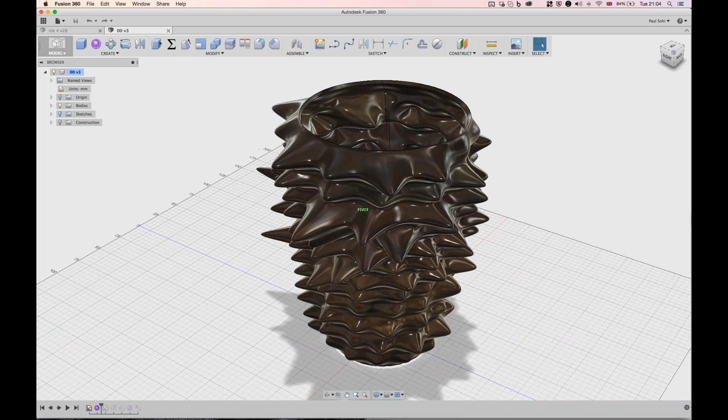If you don't, ferrofluid is an oil with very fine iron filings in it, and when you start to mess around with it with magnets, it sort of looks like it's come alive, and you get these really quite amazing shapes.

Now, this didn't actually take very long at all. It took me about 20-25 minutes. I'm going to go a little bit slower today, obviously, so everyone can keep up to date with what I'm doing, but I think that's enough of an introduction, so let's jump right into it.

So I'm going to go File, New Design here, and I'm going to jump straight into the Create Form environment. Just to begin this, I'm going to create some circles for my loft.

Now, I'm going to first go to Offset Plane, and I have this one here. I'm going to pull that up to 190. This was designed to be 3D printable inside an Ultimaker, so any 3D printer that fits that kind of volume will work just fine.

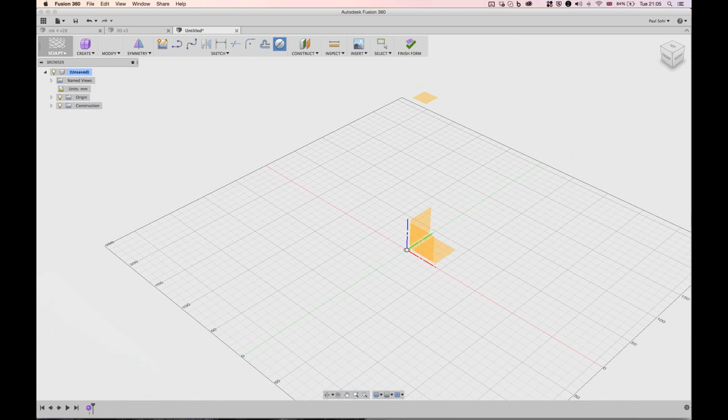Next, I'm going to draw my bottom circle. Let's jump in here and make that one. Let's go with 100 mil.

Then stop that sketch, draw my second one, and pick that plane up here. That's why I drew that one, and I'll make that one 160. So that gives us a pretty nice set of circles to begin with.

So next is loft. Under create, we've got loft, and I'm just going to pick my two circles here, if I remember to click on them properly. There we go. Now, I'm just going to say this now because it's pretty important.

So usually when you use the sculpting environment, I would say that you should treat this very much like a CNC treats a piece of wood, or more appropriately, a sculptor would treat a piece of clay. So really what you should be doing is a first pass, which is rough, and then you go through and add more details.

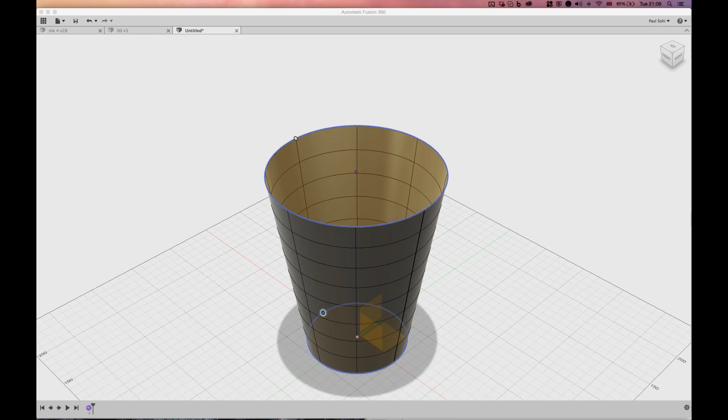So usually your cone, your pipe, your block, whatever your starting object is, you'll start with the least number of necessary vertices. The vertices here are the faces, the length spacing, and the width spacing. If I change that number here, you'll see that adds more faces to my object.

Now, this guy over here is pretty complex, and it was made just using the edit form. We're going to cover a lot of the edit form, but because I've jumped between the two tabs, it's going to assume I'm finished with it, so I'm just going to undo that and go back to the loft.

This requires a fair amount of detail. Now, to begin with, this might not make a huge amount of sense, but as we get into it, you'll see why I'm putting a lot of faces in.

So I'm going to go by 20 and 15. Actually, you know what? Let's make that 12. That looks good. I'm going to hit OK there.

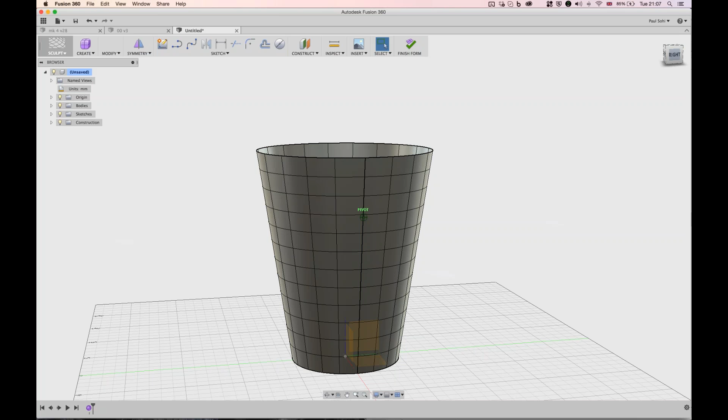So we're still in the sculpt environment, and we've got our basic piece. Looks very much like the garbage can under my desk right now. But here under Modify, my default Modify icon is missing. I don't know why that's happened. Let's just push that back up there.

We've got Edit Form. Now, when you open Edit Form, you've got a huge number of options here. And thankfully, today, I'm not going to worry too much about this.

But the ones that are worth knowing is definitely here in the selection filter. So you'll see as I hover over any of the faces here, I can highlight a face, I can highlight an edge, and I can highlight a point as well. Now, sorry, a vertex.

You might find this a little bit annoying. Maybe you're working on something that requires only manipulation of the vertices, or maybe only manipulation of the faces or edges. Well, all those options are right there. So you can just filter that down, and you can filter to just bodies.

So because of what we're doing here, I'm going to choose vertex, because I'm only really interested in the points here. So as is the case with anything else that you do with Fusion, when you're manipulating something, you'll get your manipulation ball.

Now, this is pretty interesting because it works a little bit differently to what you might be used to in the modeling environment. So in the sculpting environment, you'll see we've got a few additional ones.

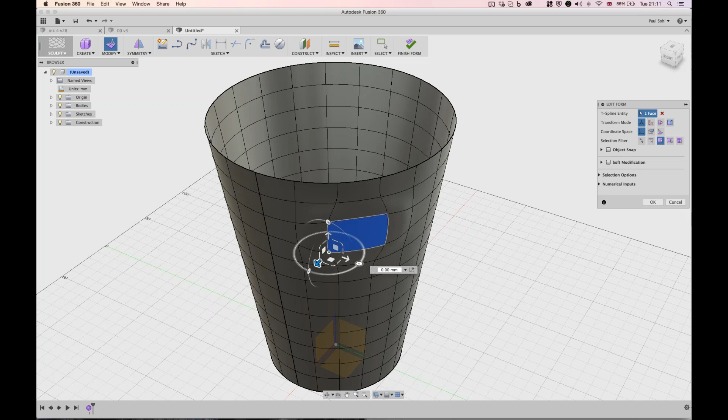And then once you've clicked in, just make sure that you OK that, because you can also change the default position of your gumball here as well before you start moving things. So if you just hit Done, you can see now, as I move that face around, how that's adjusted the pivot, and so it adjusts how this whole thing gets played around with.

So that's a pretty quick overview of how those work.

Now, in the case of this guy, what I did here was I used the pull tool, or rather I used Edit Form, and I pulled at the vertexes to create this shape. Now this was pretty intentional.

If I sort of freeze it there, you can see that there's a rotation along this line here, and that kind of follows all the way around. So if I twist it around, there is some kind of reasoning to my design.

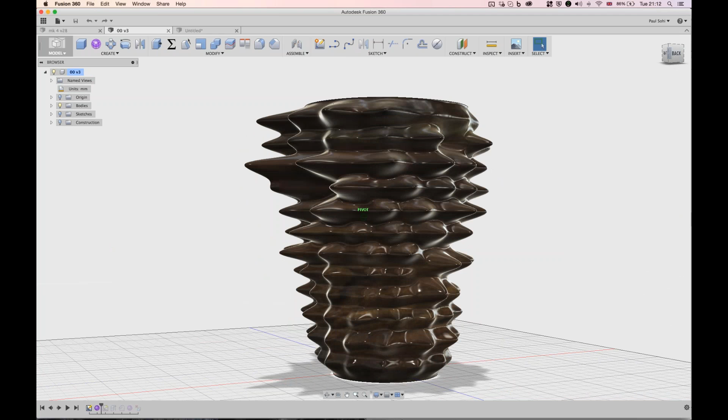Now, let's get involved. So let's grab our Edit Form, and change this to vertex again.

I would suggest starting at the bottom here. So if you're following along with me, I'm just going to grab this one here first and minimize this guy here. And I'm going to use my freeform movement here in the ground plane.

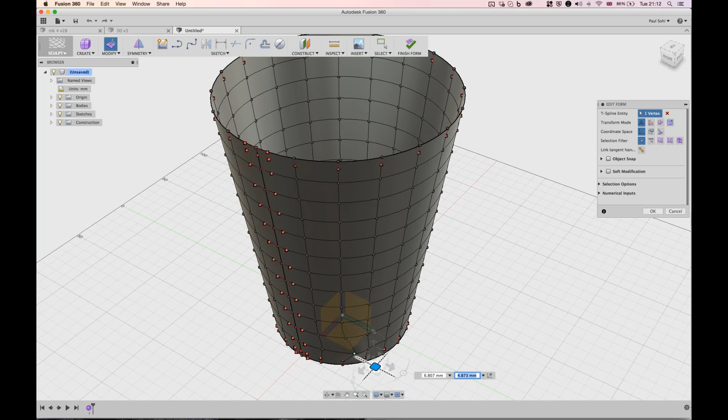So if I grab that and I pull him out, you can see, whoopsie doodle, that guy went a bit crazy. Let's pull him back into position.

You see as I pull it out, because I'm using the point tool, you get this kind of nipple effect, right? So the more you pull it out, the more pronounced it's going to get. But obviously you don't want to keep pulling it and then just look at this thing and say, well hey, yeah, I've got this nice point that I wanted, but as a result it's also ridiculously far out from my object.

So the way that this effect was achieved here is I have a push point here, and then where this indentation is, I've pushed it inside. So if I go here, you can see that there's an internal push as well, or pull rather. So I pull it out and I push it inwards, and that's how the effect's created.

So I push this one out. Now I'm going to go back to edit form, and I can grab this guy.

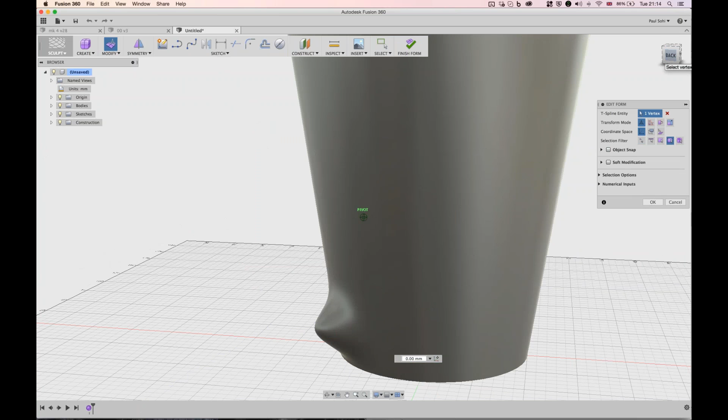I'm having some performance issues here, so I'm just going to change back to all and pull that chap in. Seems about right, but I'm still not too happy with that pointing, so I'm just going to grab the other guy over there and do the same thing.

Now, that basically covers how this form is created.

So I'm just going to go through and I'm going to grab these guys, give them some movement. Whoa, that guy is not happy. Let's just pull that round.

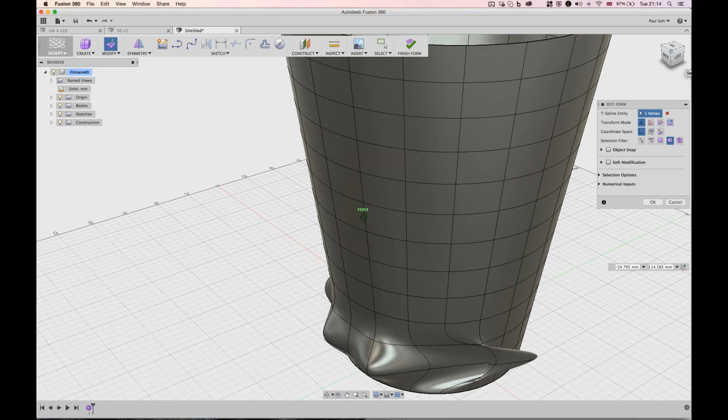And just keep that around the bottom. And start to get this.

While you're going through this, we have a question here: how did you set up the cone shape to begin with? So I did a loft between two circles. I'll start a new drawing and show you how I did that real quick.

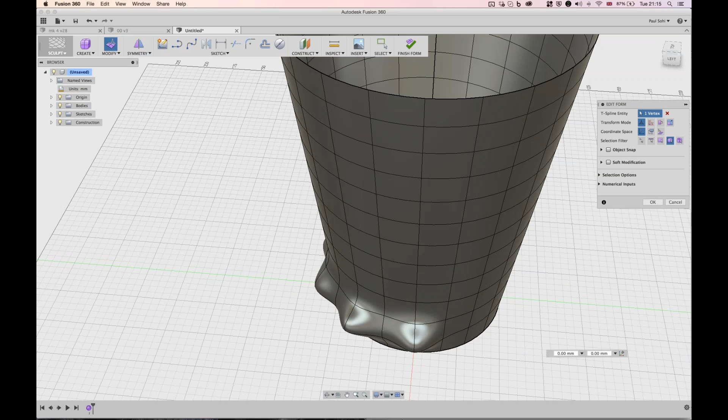Hope it doesn't throw you off too much. No, not at all. So just make sure you have your origin on - if you don't have your origin on there. And I'm in the sculpt environment, so if I go back to model, you see just to get to the sculpt environment, we've got this create form.

And when you click on create form, you'll see this snaps, and you've got a new tool set here, and you're in the sculpting environment. And the sculpting environment is T-Splines, so if anyone knows what T-Splines is, that's the kind of environment we're working in.

So the first step here was to go under construct and pick offset plane. And the offset plane allows me to grab that origin point and then pull it upwards to create a second drawing plane. I'm not going to use dimensions this time around just to show you how I did that.

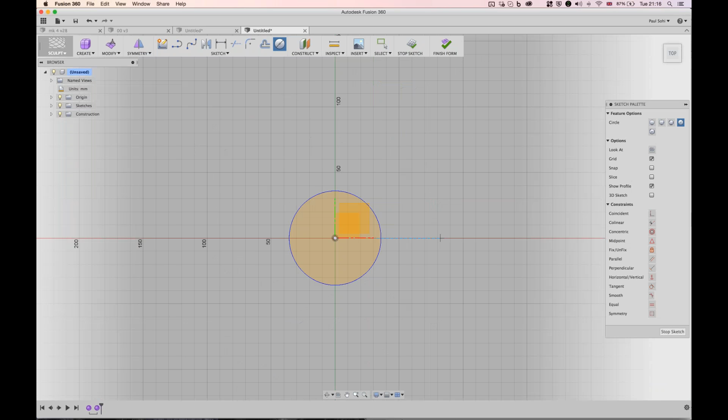So go 130, and I drew a circle on the top, on the ground plane first. Let's just make that there. I stopped that sketch and drew a second one on this plane up here. Pull that guy out and stop that sketch.

And under create, we've got loft. So that's how you get your cone. And then you can add the number of faces you want here. When you're happy with it, you can just hit OK.

You might get thrown off by this - like my default logic the first time that I made this was to go to create and then pick cylinder, and then I scaled the whole thing out. I don't recommend you do that because you'll end up with errors with this guy. But I hope that - yeah, that's perfect.

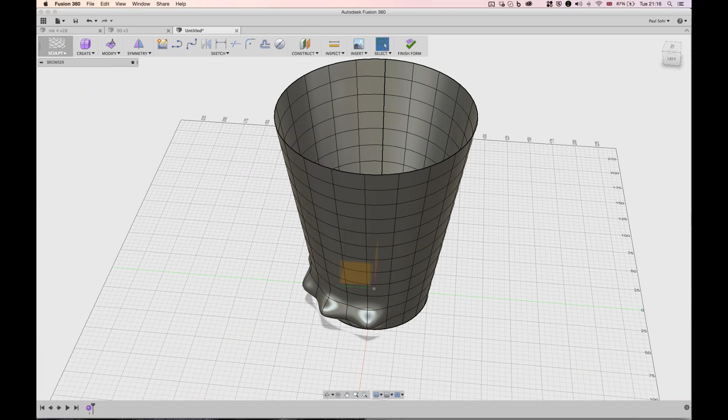Thank you. No problem. So I'm going to go through and I'm just going to keep on doing that around this guy until, whoa!

While you're working through this as well, we have another quick question for you: could you use the mirror command to speed up the pulling process?

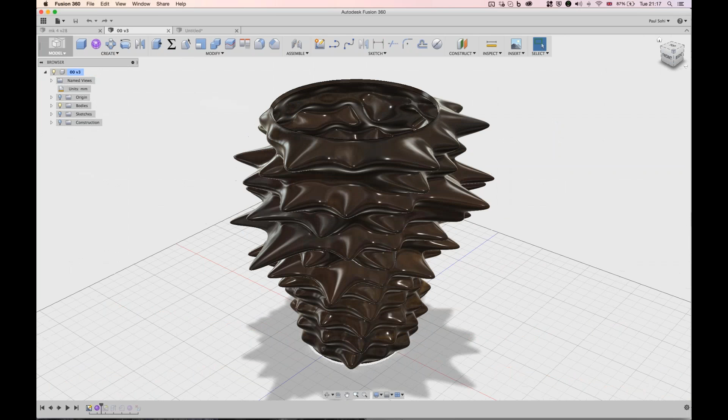You absolutely could, but in the case of this design, you'll see that this isn't actually symmetrical. So while I have this kind of rotational pattern here, you can also see that I've, if I could put my extremely haute design hat on, created these moments on this sculpture. So there are these points that get pulled a lot further out, like over here. And if I was using the mirroring tool, that might work for the first pass, but then you'd have to not be mirroring anymore to create these effects without bouncing off on the other side. But if you wanted a very symmetrical form, by all means, you could absolutely do that.

You've got to make sure though, if you're going to use symmetry here, that you've got a form with actually an odd number of vertical edges, so that you can pick one of those to create a uniform symmetry line. I'll just show you what I mean quickly. If I grab a box and I draw a box here, if I pull that up and I want to create a symmetry across here, this will be fine because I've got one edge running the whole way through.

But if I pull it so it's like that, and I have 3 faces and 2 vertical edges, if I try to create a symmetry line here, now if I go under symmetry and I create mirror internal and I do that, can you see how I've got these green lines all the way across like that? It's not going to work. It's not going to be ideal for what you want.

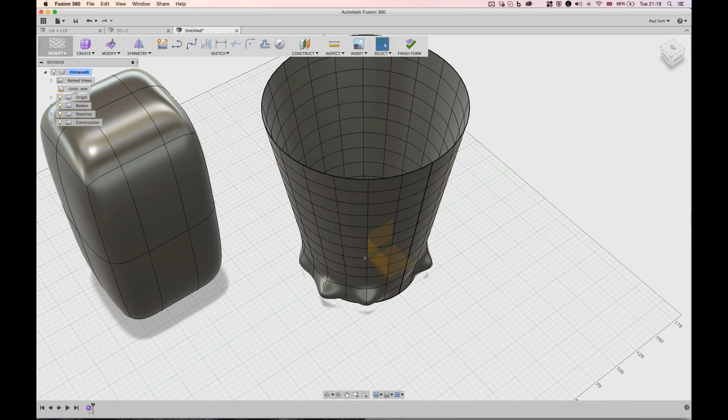So what you would want is, I'll do that one more time real quick. So if I do this, let's just okay that, and I pick symmetry this way, I've got a nice continual green line. And that way I know that my symmetry is going to be nice and is going to work properly. So let's just get rid of that guy. And we've got our final modification down here. You can pull that up because that's actually in the plane.

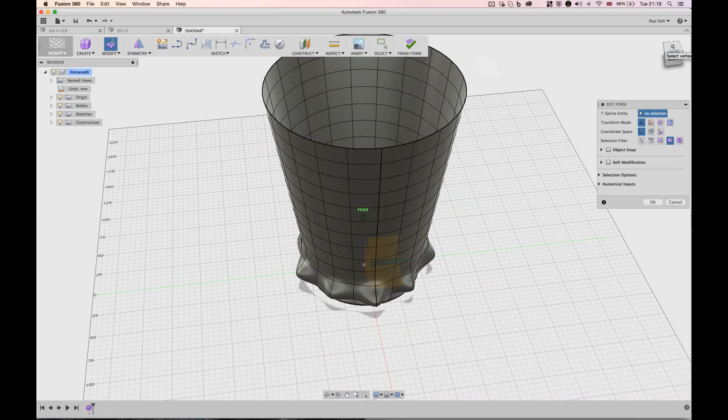Now the next step with this guy is just to go through and pull these ones in. Now I'm just going to show you a slight shortcut to that. So I'm going to go around and I'm going to pick these guys one by one. I've got nearly all of them. Of course, bear in mind, anyone who is planning on making one of these or is making one right now, I picked this number of faces because I want a relatively complex object. You could have picked less, and if you pick less, then you'll have a less complex thing, but you'll certainly achieve the same kind of aesthetic goal here.

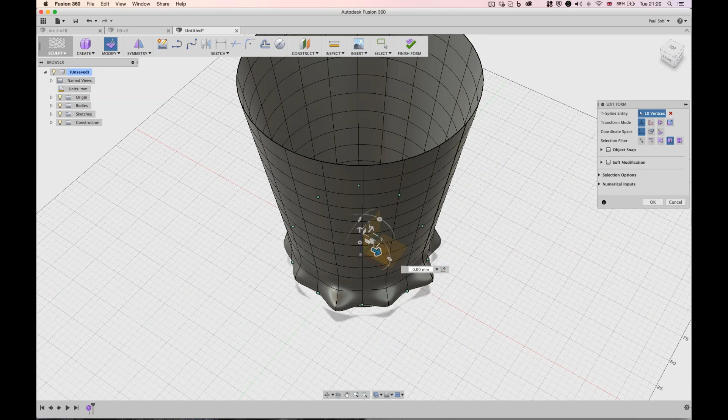Now you'll notice that because I've picked all of them and I'm in a circle, my manipulation tool is right here in the center. And because I want to create that inward indentation, I'm just going to grab my global scaling and pull that in. Oop, if I can pull it the right way, there we go. And that's starting to give me a nice kind of indentation effect. It's a little bit more pronounced here because that's the one that I moved manually. And I'll just keep going around and you can see how that's happened.

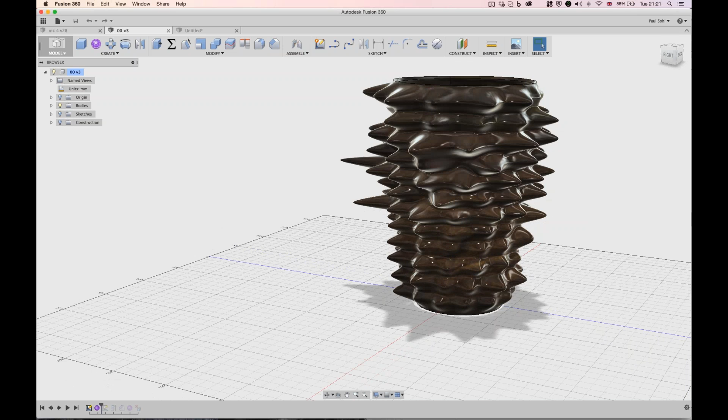And just to keep that pattern going and to create that rotational effect that I've got here, so you can see how that sort of staggers its way up. That's created by just doing the same thing that I've done here, but pulling one dot across. So I picked this vertex rather than the same vertex above it, and if I pull this one instead, you'll see what happens. So now, I've done this on purpose.

You'll notice that there's a bit of a problem here, because if I grab this guy, then I'm affecting everything, and that's not really going to give me the shape that I want, because if I then go and do that here, I'm going to end up with a bit of a weird kind of, grab the right one, excuse me, where are you? There you are. Grab that through, and that's not really going to create the effect that you want. You're just going to end up with this weird kind of amorphous blob.

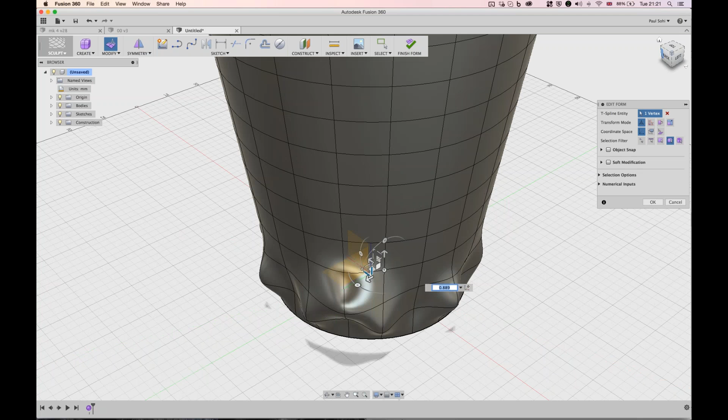So you actually have to give yourself a bit of spacing, and that's part of the reason that I picked such a high number of faces to begin with. So I can't grab that guy. I've got to grab this guy up here. Now, I grab that vertex and I pull it through, and you can see that I'm getting the effect that I want.

I'm still affecting this guy down here, so I will have to come through and pull him inwards to counteract what I was doing before. And that is starting to take shape. So I'm going to blast through this. So we got something kind of nice.

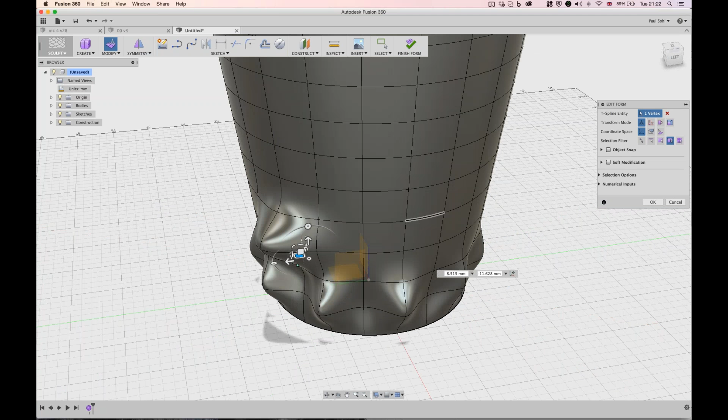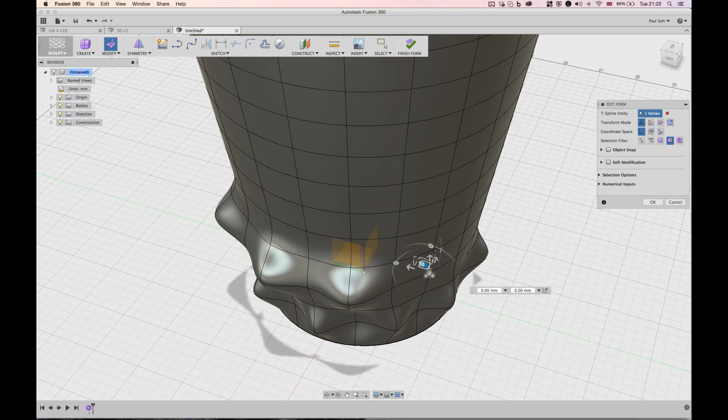Now if you're 3D printing this yourself at home, this does work on an Ultimaker. I've printed this out a couple of times on an Ultimaker. It does take a while. It is a pretty complex object. Any FDM machine should be able to handle this if you're smart with your support material. But for best results, I guess, always use SLA.

Let's just go through and just keep grabbing those guys. And one more. And just keep doing that. Oh, this one's gone a bit funny. Let's pull him out over here. This guy, do that. And maybe there. All right, and this is starting to take shape.

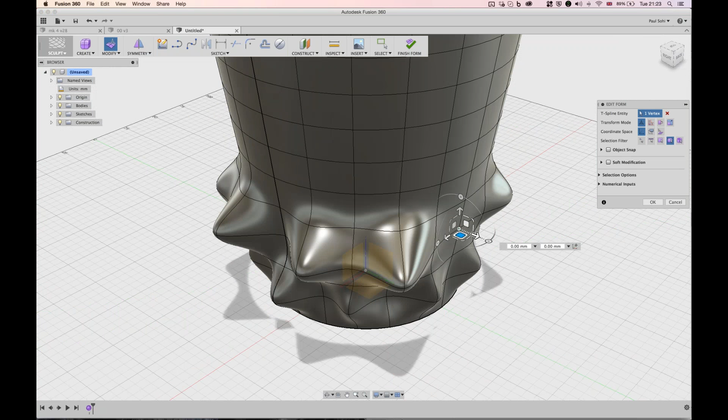And so what I was talking about earlier, if I grab this guy, so this point is relative to here, and then correspondingly over to here as well. So if I grab him and I move him inwards, you'll see that starts to create a really nice accentuated effect on what we're trying to get. And let's just pull him out a bit more. So let's give that guy a little bit of definition. All right, whoa.

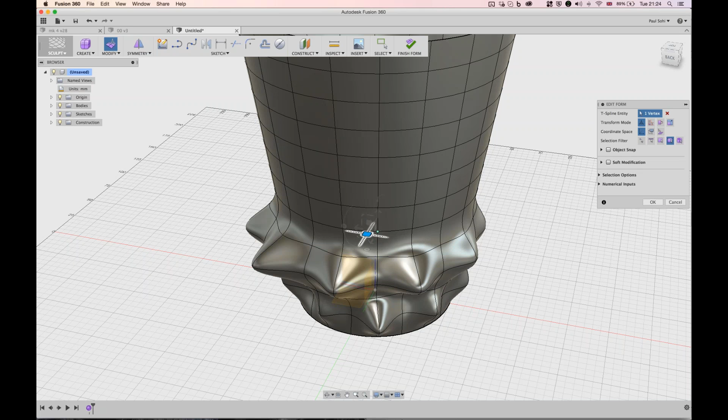So once again, I could pick this guy, but if I do that, that's actually the correct one. So I'm just going to do that. I'm going to keep going around, and of course, keep firing those questions at me if you have any more. So let's go through. Let's grab these guys.

I have one more for you, but it might take a little bit of time. Oh, go for it. All right. So could you explain a little bit more about the star and T-points? Like, when do they appear, and what good are they, and how can you avoid them? Sorry, the star? Sure. Oh, right, I can't see the questions. The star and the T-point. I'm not actually sure what that's referring to. Pascal, if you're still around there, could you type in a little more?

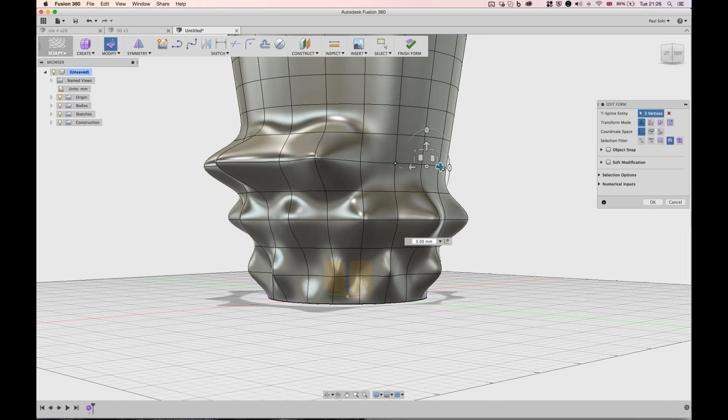Another question while we wait, is there a way to pull multiple points at the same time? Yeah, of course. So if I got one point and I grab this other guy over here and this one, just in the same way. So if you're on a Mac, you can hold down Shift, and on a PC for that matter. Or you can even use Command. So I've got 3 selected there. Whoops. Oh no, we're still good. All right, let's rotate around. I grab my manipulation point and I do that.

It is going to generate the same kind of effect, but not to the same degree, because in my case, what I'm trying to create is this sort of not strictly uniform, but relatively radial pattern. So you can see the points are sort of tangential to the circle here. So by all means, I could grab a few at the same time and do that, and then I could sort of correct it out with the global scale. But it's not quite what I want to do. But it does kind of work. So that is certainly another way of doing it. It's certainly a way of speeding the process up.

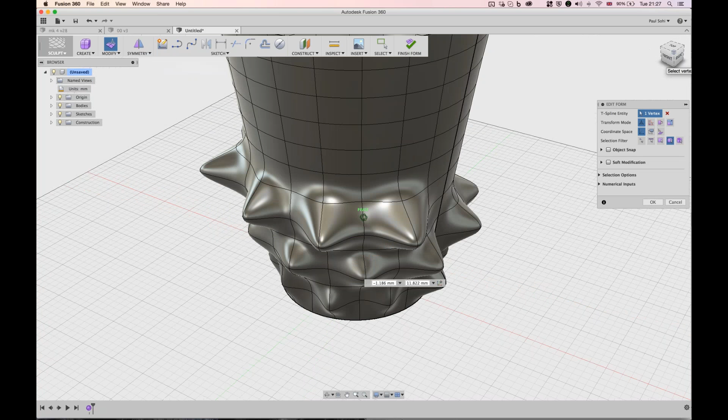It is certainly worth noting at this point, while we're talking about the sculpting environment, that it is pretty radically different to the modeling environment. Now, the way that I think of the modeling environment is that what I'm doing is very specific. Everything that I'm creating with purpose and intent. Now, that is also absolutely true of the sculpting environment. The only difference really being that with the sculpting environment, because you're dealing with a very free-form object, you can see that as I'm pulling it and pushing it around, it is quite organic. It sort of responds to itself.

It does mean that the kind of tips and tricks that we would share for the model environment are not necessarily going to work in the same way here in the sculpting environment. So there is a little bit more patience involved, I suppose. Maybe not the right word for it, but it's a very different beast to your standard modeling environment, and it does take a little bit of getting used to.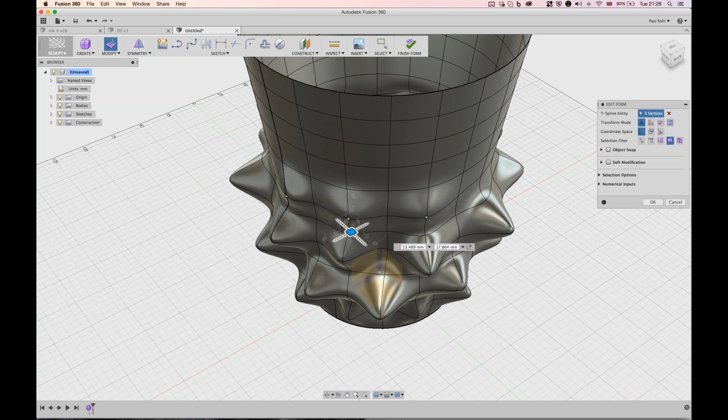But I guess, so we're halfway in, and I want to make sure that we've got time to look at that controller. So I will do that. Contrary to my earlier point, I will actually grab a few of these at the same time and use that global scale trick. And do the same thing here. So grab those guys, pull those inwards, and then global scale them that way.

Now it doesn't look quite like my one over here. You can see this is a little bit more kind of detailed. The points are sharper. Of course, some of them have been pulled out a bit more, but it's exactly the same method. So it's just a matter of spending a bit more time with it. Let's make sure my modifier is back on. There we go.

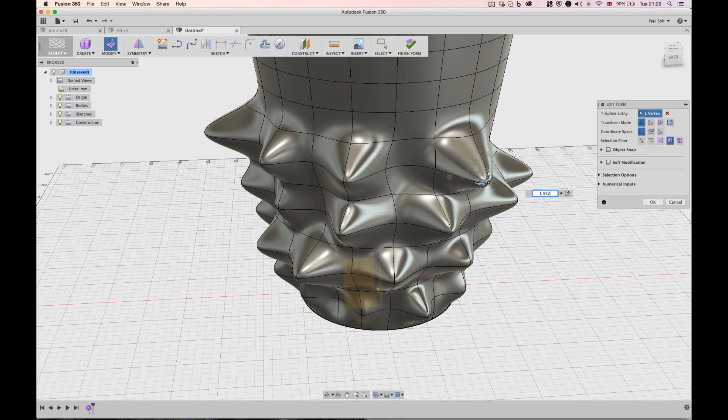And let's grab that guy. Oh, I've made a bit of an error here. That's okay. I think for the sake of what we're doing here, we're going to be all right. Let's just keep going until we're at the top. And I'm going to pull this guy out and create a bit of a feature out of this one. So let's grab a few more.

Did we get some explanation on that other question? That we did. We got a number of points here. So basically, the star point allows T-splines to be non-rectangular. So when 5 lines come together, so 5 T-spline edges come together, it would be making that star point. And the T-points can be created by many commands, such as insert edge, insert point, so on and so forth, and are used to constrain details. So I guess everybody else is helping out with the answer in addition to clarifying.

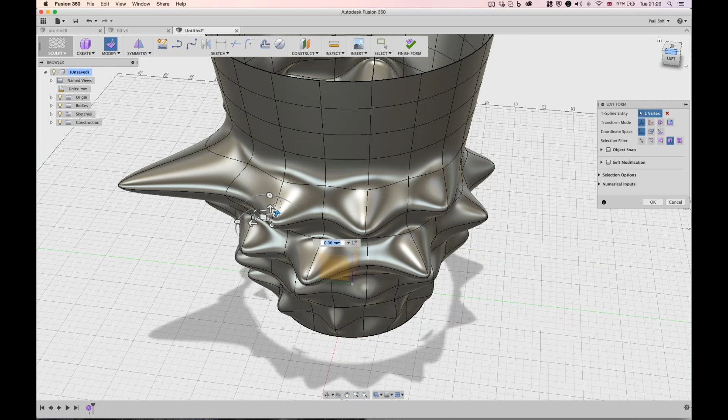Yeah. Oh right, I see what you mean by the star point now. That's a tough one. That's a tough question to address. It's so contextual to the kind of modeling that you're coming up with. Now, this has happened to me a couple of times. There are a few tools in there that can certainly clean that up. I would say here we have on the modify. There is a tool called, which one was it that I used last time to fix my issues? Not merge edge. My goodness, I was looking at it the other day. Right here. So make uniform is one that could help.

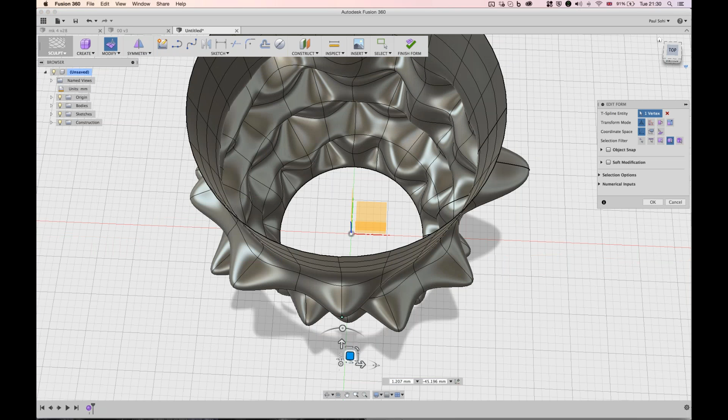Otherwise, sometimes it's a case of just depending on the kind of object you're working on. So some of the times that's been an issue for me. I found that separating the object out, playing around with the vertices a little bit, and then welding them back together helped to deal with the problem as well.

I'm going to just make this guy a little bit more pointed. Oh, you can see there's another case where my pivot is not where I want it to be, so it's not achieving the effect that I want, and I'm going to just grab this guy, and I want my pivot to be here, so that as I rotate it around, it's going to exaggerate this point a little bit more, and let's just correct that out.

And this acts as a good example of what I mean regarding the sculpting environment. You will understand that as I'm doing that, what I'm trying to create is a pointed effect, and it doesn't quite behave the same way that your model environment would. Now, you can certainly achieve the effect that you want. It's just a case of the patience involved to pull it off. Now, let's just grab a few more.

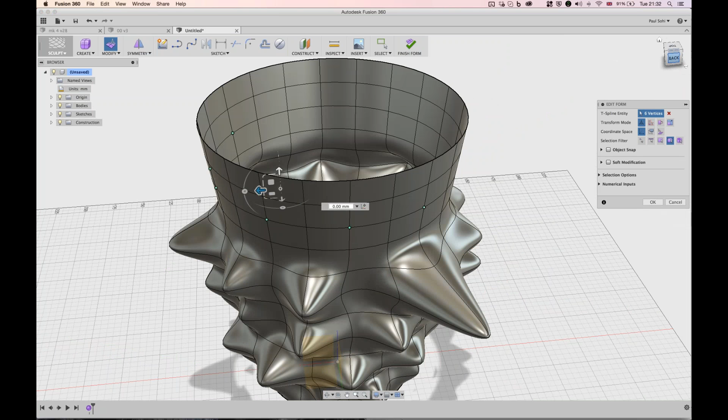Let's just turn this guy on, pull these ones out, and let's do that. Okay, nearly there.

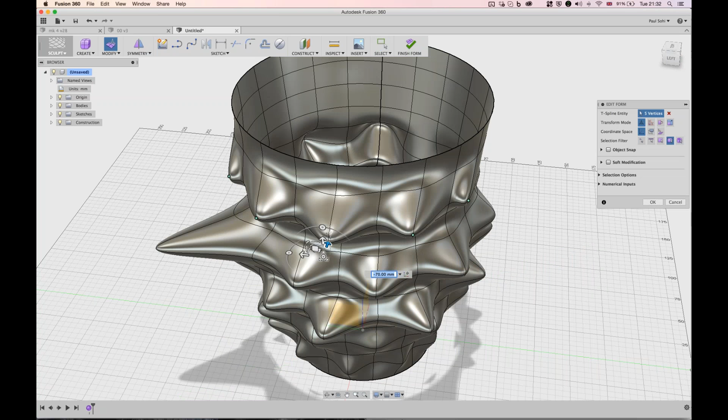One more. So I guess it's pretty obvious by this point that the edit form tool that we're using here is really quite powerful, and it is going to be the sort of mainstay for a lot of what you're doing.

So if I just zoom out here, you can see that in this sort of 20-30 minutes that I've been talking, we've generated something similar, if not exact. Obviously, I spent more time on this guy, and I was working with more faces, but we're kind of there now.

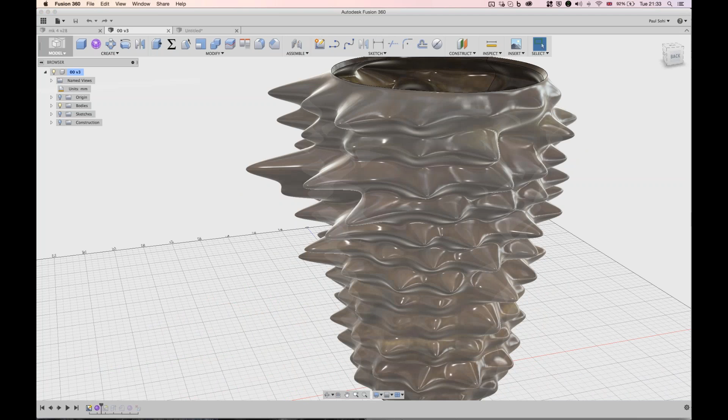Before we wrap him up, we need to give this some thickness. Otherwise, if I hit finish form here, I've got a patch, not a body. Not particularly useful. So we can thicken him here in the model environment, but let's do that in the sculpt environment. So I'm just going to double click back here, and I'm going to modify and thicken, and just click on him, and let's give it a thickness of

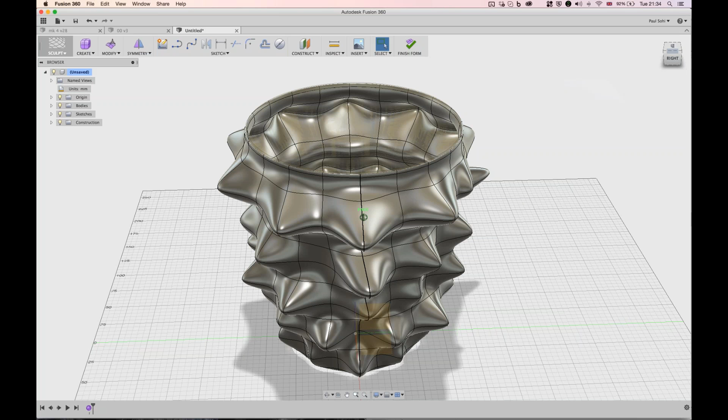2.4. And that should work, and I want to give it a soft thicken there. And hit OK. There we go. So kind of got what we want.

So I just showed you that quickly, just so you know that because I used a loft and I had a cylinder with no thickness and no top and bottom, Fusion is not going to treat that as a body. It's going to treat it as just a patch, which is what it is. And if you want to 3D print that out, obviously you've got to give it a thickness.

Now the reason I've chosen 2.4 millimeters in this case is because I'm working to a denomination of the nozzle thickness, and I know that if I pick 2.4 millimeters, I can also make my shell 2.4 mil thick and ensure that I've got something that's going to work. So I'm going to finish the form, and it's going to have a little think there.

Now what I like about the finished form is that if I created any kind of intersecting faces, that final calculation that's happening there while it's thinking would have warned me and said that your surface doesn't work as a kind of real-world object. If you try to print that out, it wouldn't work because you created geometry that's just physically impossible. I'll show you how that works.

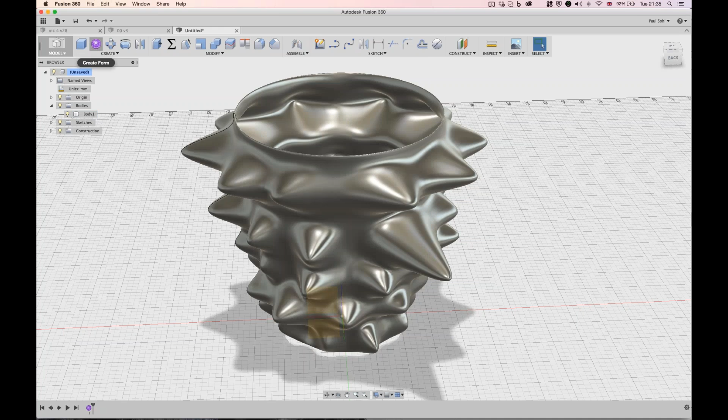So if I just create a box here, let's just pick over this, and let's pull him right up and give it a bunch of faces. Just real quick. Okay. Now if I grab this one, let's say modify, let's move the screen over so you can see what I'm doing a bit better. And let's just pull him in like that. So that's fine so far.

Let's say I grab this guy and I just keep pulling him until, so you can see that now that I've let that go, you've got an intersection here, and that doesn't work. If I hit OK and I hit finish form, immediately it's going to tell me that this isn't going to convert and that there's a problem with it. And that's a really good function to have in place.

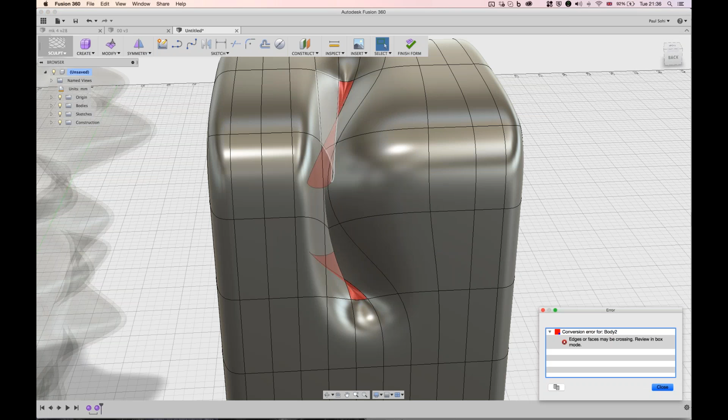Now, in the case of what I've done here to demonstrate how that works, that's obviously quite an extreme thing. You'd know if you'd done that. But in the case of a pretty complex object with a lot of faces and vertices that are moving around, you might have these tiny little intersections that you'll not notice that you've created. And Fusion's going to pick up on that for you, and it's going to let you know that that's not going to work.

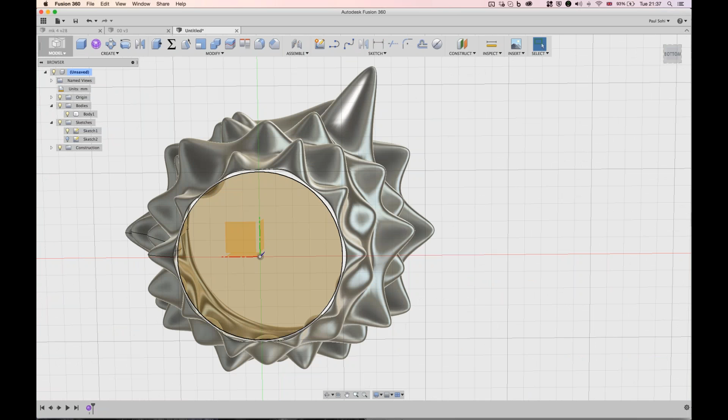So I'm just going to finish the form here and delete this guy because we don't need him. There we go. And just to wrap this guy up here, I'm going to open this up, and I've got my bottom sketch that I created to begin with down there. And you'll see that it doesn't quite fit. So what I'm going to do is I'm just going to double click this sketch, edit. Where's my edit gone? All right, I did that in the form, so I'm just going to create a new sketch.

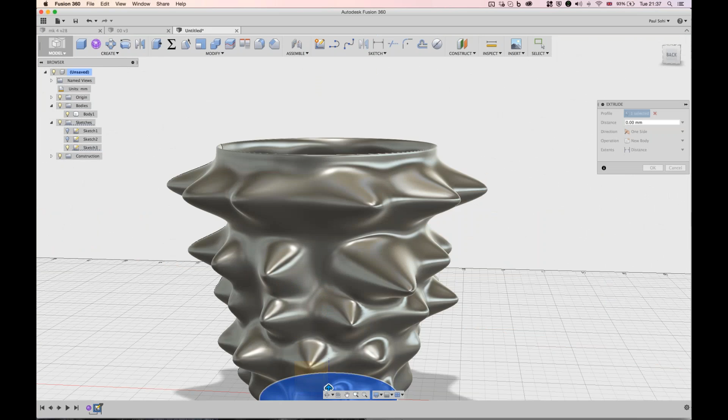And let's go with circle. Let's just make a circle that's just slightly bigger than that radius that we had to begin with. So I'm just going to go there, stop that sketch, and turn sketch 1 off. And I'm going to use my press pull, grab that, and just push this up a little bit. So let's say 3 millimeters. And change that from cut to join.

Now, I'm rushing here, so this is a little clumsy, but if I hit OK, I now know that if I 3D print this out, I've at least got a nice base there. So that's the very basics. So that's that guy there. Now I'm going to jump over here and show you this one.

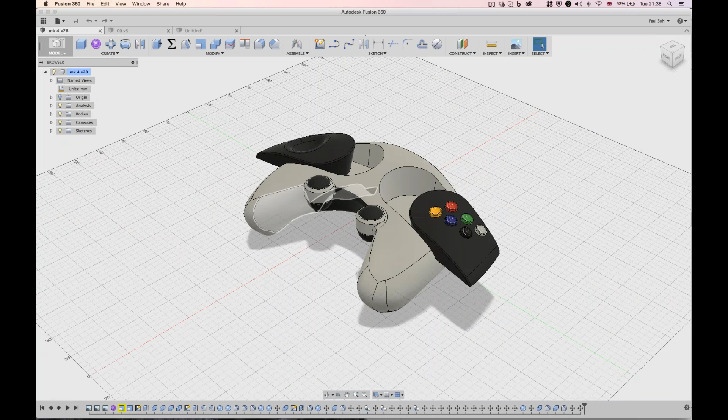So this is a game controller that I'm working on, and I'm coming back to this model every now and again, and you can see there's a fair amount of complexity to this geometry. Obviously, these features here, like these thumbsticks and these slide-out cartridges, these are added later on. But if I jump back to my first form, you can see what I've got there.

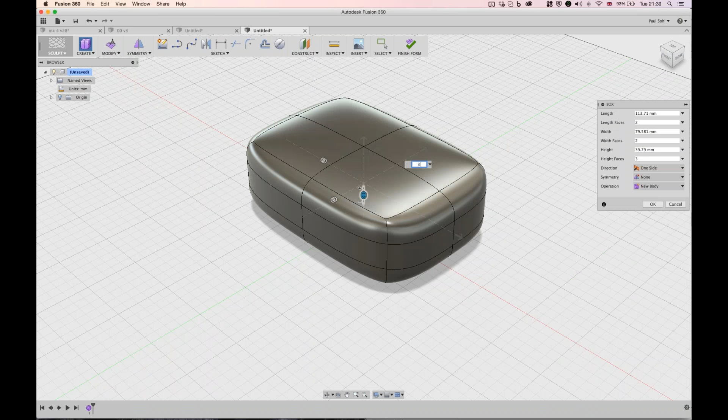Now, I created that from the box tool, and I'm just going to show you how I did that. So I'm going to start a new design, and I'm going to go to create form, and I'm going to use a box. I'm not going to do this one to any dimensions. I'm just going to show you visually how this guy works. So we want 4 in that direction, and I think 4 in that direction, and then maybe, yeah, 4 in that direction too.

Now you see before, when I was using symmetry, I was jumping over here and using internal, but you can actually just add symmetry straight away here in the dialog box. So I'm just going to add a mirror, and then I want to mirror it along the length, and hit OK. Now I'm just going to cover this very quickly in 10 minutes, and then when the 10 minutes are wrapped up, we've got a final 10 minutes and we can do some more Q&A.

But this shape did become this, or rather, this guy here. And you can see I've got a few features here that I worked on to create this. And you can see, like here, we've got an edge, and that face doesn't have that. There's a couple of features on the underside as well, like these hard edges. So I'm going to show you those real quick.

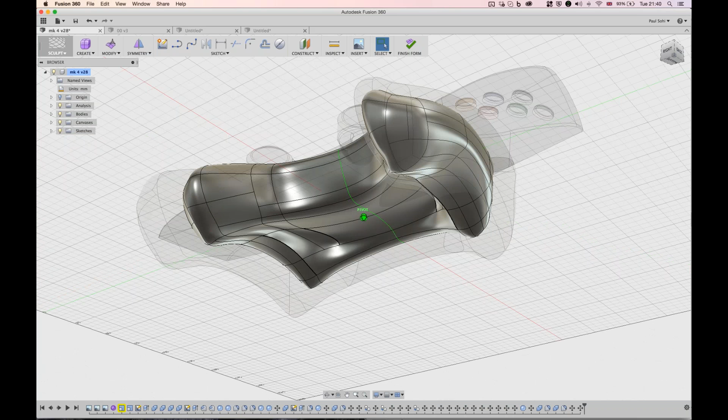So this guy here. Now, when I created that controller, this is what I was talking about before, of saying start with a first pass and then add more detail as you go along. So the very first thing that I did was I grabbed these 4 faces. You can see that as I grab and I select on this side, I've got a yellow selection on this side, and that's just the symmetry of what I'm working on.

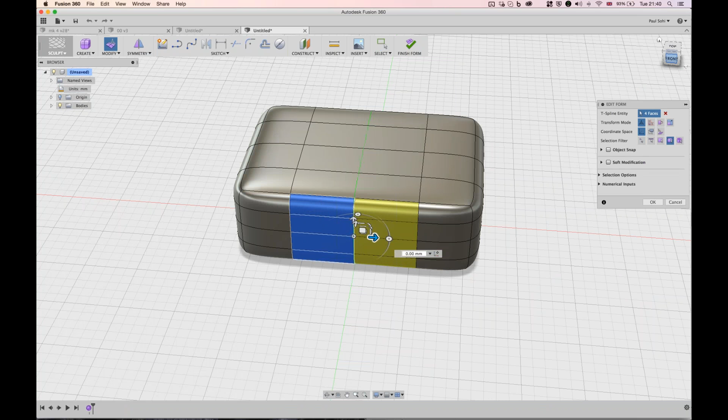And I'm going to change my pivot to be here in the center, green tick, do that, and I'm just going to push this in. You can see as I'm pushing it in, I'm starting to already get a very, very rough, I would say, an avatar for a game controller. And now if I pull this guy out this way, I'm starting to get a little bit more what I want, and I'm going to rotate it.

And then, whoops. I don't know why that keeps happening to me today.

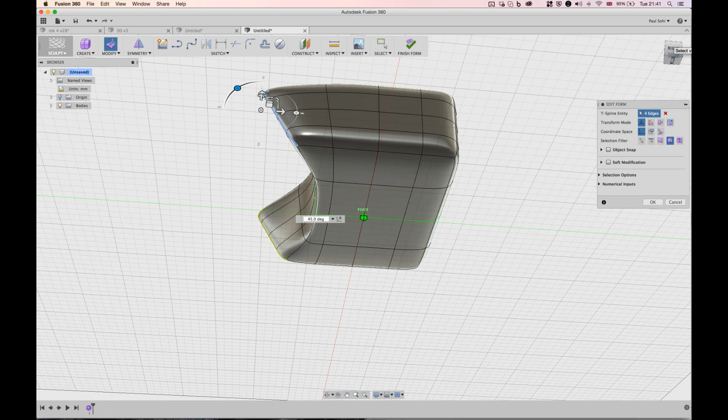Let's rotate it around there. That's good. And just grab these faces here, push those up. And then, not that, I want to grab these faces, these edges rather. And not that face, but those edges. Grab those. So look at it here and start to push that up a little bit.

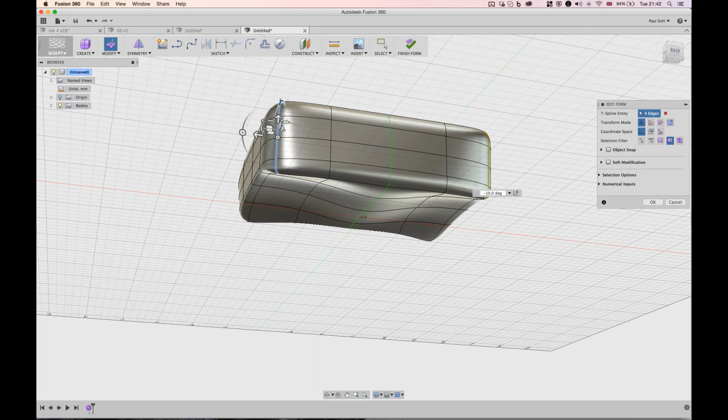And then where I have my triggers, I can just grab this edge and start to pull that in and go back to my right view and rotate that around. And then just over here, grab this guy, pull it in. And you can see that just in these 5 minutes that I've been messing around with it, you're starting to get a very, very rough idea that, if I didn't tell you what I was working on, you could probably figure out that I'm making my way towards designing a game controller.

Let me grab this one and pull that in and then scale it. Now, let's rotate this guy as well. Bring it around. That really will start to give you a shape that is going to do what you want it to do. It's going to start to look like your controller. And I'm going to rotate this guy a little bit too.

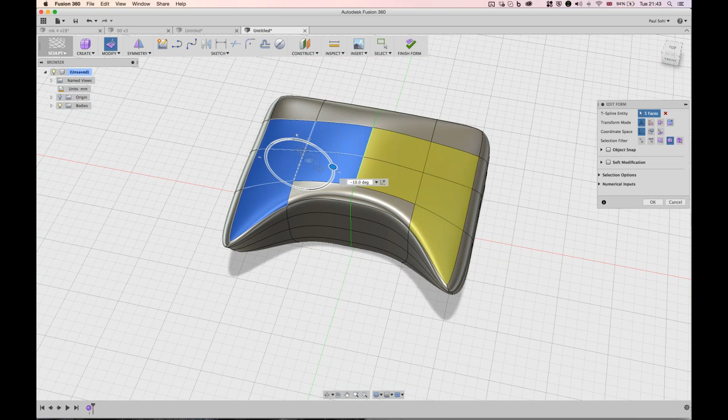There are some extra features and some pretty cool things you can do with the sculpt environment. Let's pull that in. If I try to finish this form, I'll get an error again, or a very sharp edge that's not really pleasant. So I'm going to pull him in.

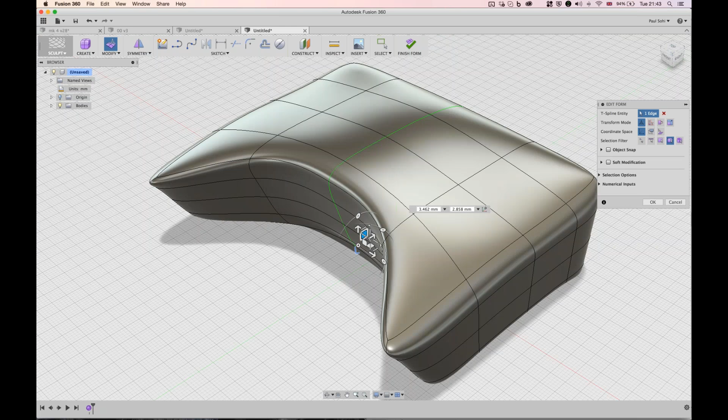As I've been playing around with the sculpting environment, this is all well and good if you want to create blob shapes. If we were doing the Xbox 360 controller, that'd be great - that thing's a very smooth object, there's no sharp edges on it at all. But if you were doing the Xbox One controller, there are sharp edges on that guy. We can get a pretty good idea of where we could start to create some hard edges or hard faces. So under Modify, there's a whole series of tools here.

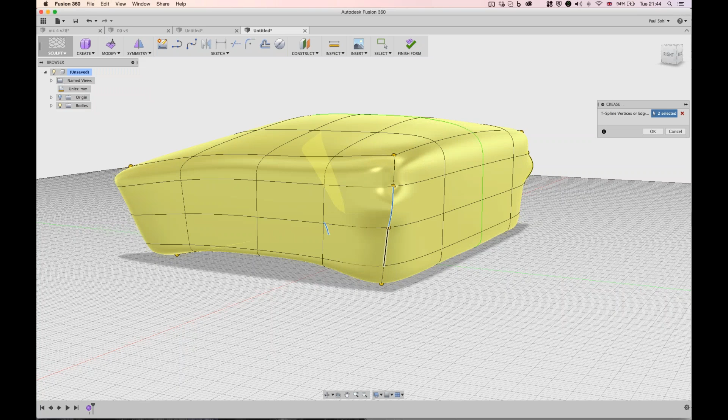Two of my favorites are Crease and Bridge. First I'm going to show you Crease. Crease basically takes an edge on your object, and as you can see, as I go around, it's starting to harden that corner. If I hit OK, where I had a very rounded corner before - I'll do that in the top view so you've got a better idea - I've now got a sharp corner. If I undo it, you can see just how much of a difference that makes. So when you need to mix the two together, that's something you can do.

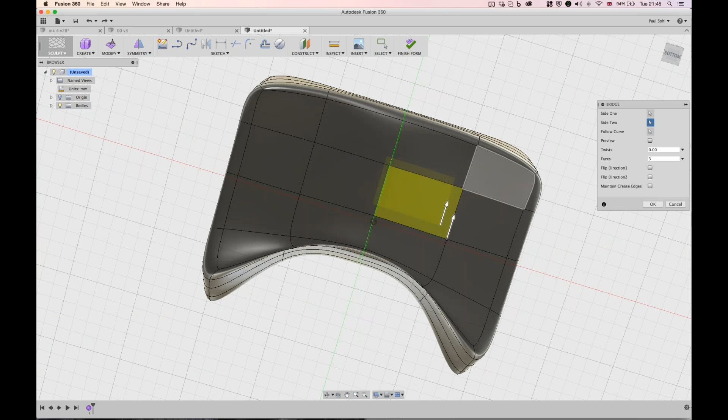Now the bridge tool is a pretty different kind of function. You can bridge internally, and I'll show you what that does. If I create a bridge here and select the corresponding underside, and hit OK... why didn't that work? Let's try it another way - go here and here. So you can see what that's done is essentially created a bridge. In the case of a solid object, it's created an inverted bridge between those two faces, and it averages it out for you, doing a lot of the hard work.

This has been really popular. This was really popular with me when I started using Fusion because it basically meant I could do what was very popular with architects at the time really, really quite easily.

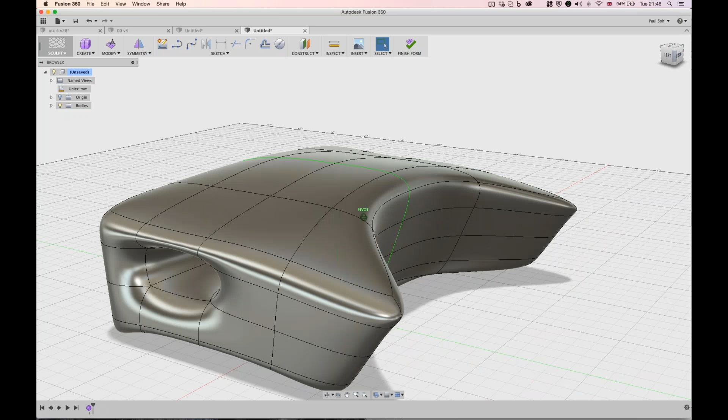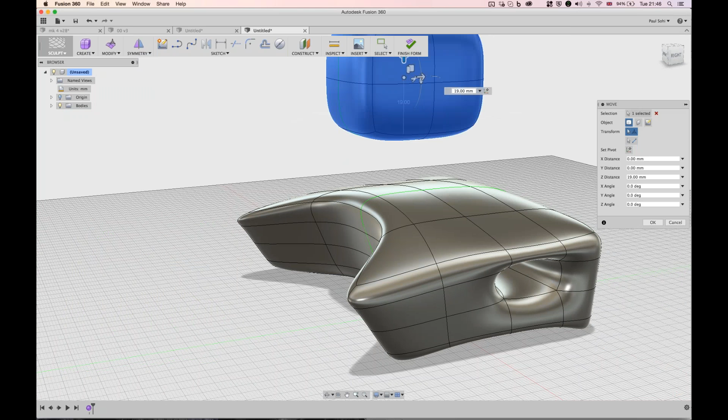But you can use the bridge tool in another way too. If I create another box over here and pull that out and hit OK, I can connect between these two objects. So I can go back to bridge, pick that face, and pick that face. If I hit OK here - one of the T-spline bodies connected does not contain symmetry. Whoopsie doodle, let's just move that over and pull that over here, move that up again. Let's connect between these two faces. Bridge - let's bridge that guy, and let's bridge that guy.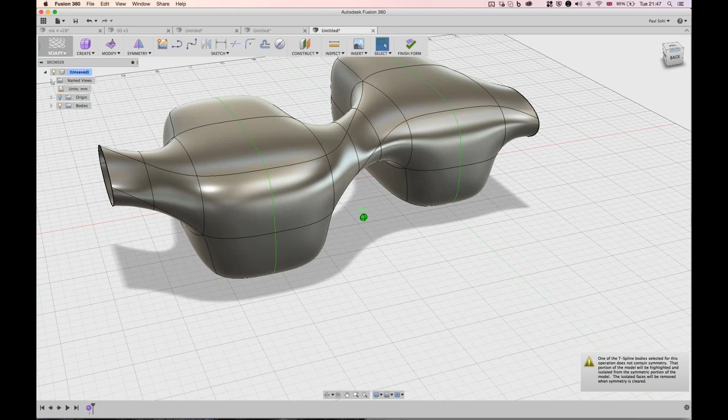I don't know what's going on there, so I'm just going to create a new file to show you how that works. Let's bridge. There you go, so you can use that to connect objects together as well. That's gone a bit crazy there, but I assure you usually it works pretty well. I think the reason that's happened is I didn't align my arrows, so let's bridge one more time. Side one. Now let's OK that. There we go, you can see I don't have a rotation split here.

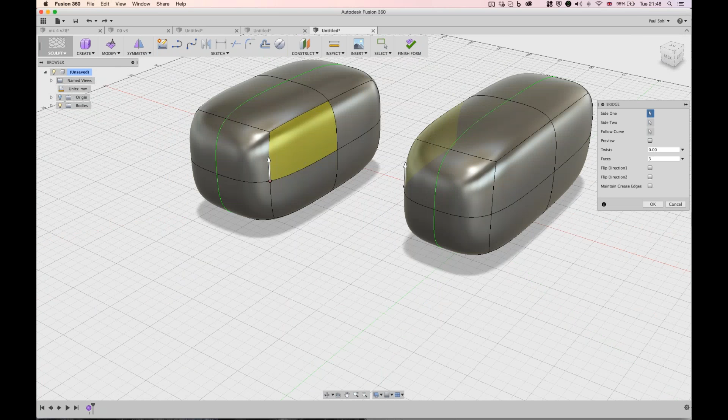I guess that covers everything I want to show you with the sculpt environment. I want to say that the stuff I've shown you today is like we've really just scratched the surface. There's a whole list of tools here that all do fantastic functions. Pull is another really great one that I love to use. I get sent a lot of 3D scan data, and sometimes I just get an STL and the person I'm trying to help out expects me to be able to do something with that. Now if you bring that into Fusion, there's not a huge amount you can do with just a 3D scan file if you've uploaded an STL into the work environment.

But what you can do, say for example with a 3D scanned object, is create a cylinder around that, and pull all the vertice edges onto the surface, and then it starts to create an approximation of what was there to begin with. And I can show you that with this guy over here - I have a plaster cast of an object.

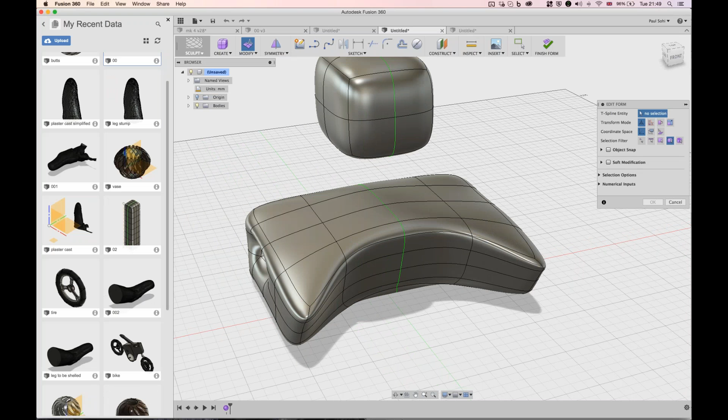And I opened the wrong one. Wasn't that clever? Where has it gone? Nope, wrong folder. Oh no, it's that guy there.

So you can see here, that's the scan that I had, and that is the sculpt environment created from that same scan. So that's the scan. If I turn that around, now...

In bodies, you can see that this is a mesh, and usually you can convert this, but if I try to convert this object, it's not going to do it because I don't have any quads. I've only got triangles. That's a bit of an issue.

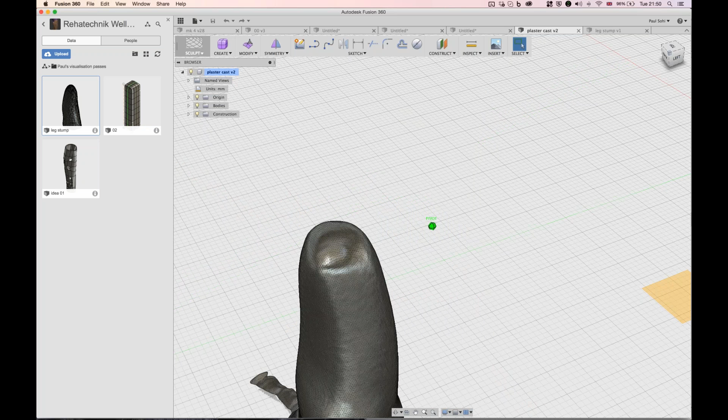What I can do, though, is what I did in this case: I surrounded it with a cylinder and created something with a huge number of faces, as you can see here. Then, using the pull tool, it automatically basically magnetizes itself to that scan and gives you an approximation of what the scan data was. This is editable and usable in Fusion because it's a T-spline surface. That's another one of the really great functions in the T-spline environment.

So I guess I'm just going to open it up to questions now. I think I've...

Are you able to, you got any more questions, James? Are you able to see them, or would you like me to read some of them to you? I can't see any of these questions. Okay, so how about this? I can't see the questions.

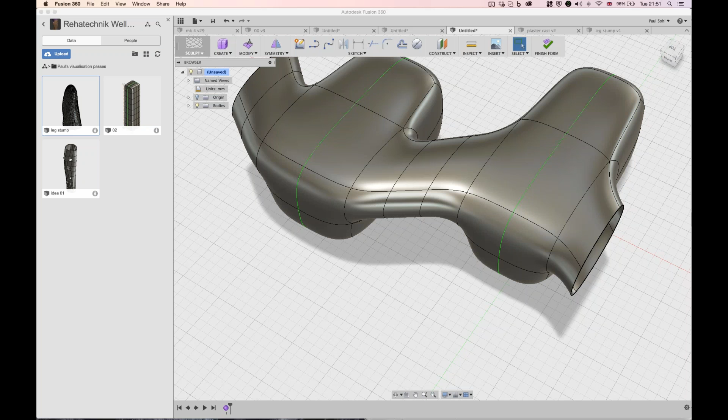So, how you pulled in multiple points at the same time all the way around the base - can you do it the whole way around? I'm guessing like double-clicking a line and getting the whole line selected around the base is what he's going for there. So if I double-click like that, I can select the whole edge.

But if I modify this now, so if I grab this, can you see how that's affecting it? It sort of treats it like a platter. There you go. So it's not quite going to do what we wanted to do here.

But if I did go around and pick all the points, once I create a loop, you'll see... I'm just going to minimize that. If I go all the way around - now I'm not sure if this is going to work because I've made so many changes to the object - but can you see as I'm doing that, my gumball is changing its position? It's averaging itself against... oh, I lost my selection there.

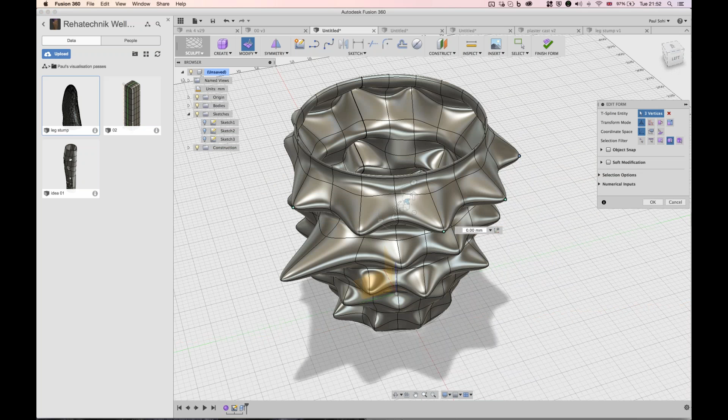It's averaging itself against where those points are, which is why it keeps moving around. Now, once you've created a loop, that should then put itself somewhere in the center. In this case, it's because I'm missing a few - let's grab that one and that one. There we go, and that's sort of in the middle of those guys. Obviously, if you try to draw a line around this, you'd see it's not uniform anymore, but that's one way of affecting those objects.

So you can see how that - and I've got that face selected. I don't want to, there we go. Now the face is deselected. Now I'm in the middle, and I can start to affect them like that. Perfect, so that's one way of doing it.

Could you also jump into the patch environment and show us how to seal off the bottom of the vase? Sure.

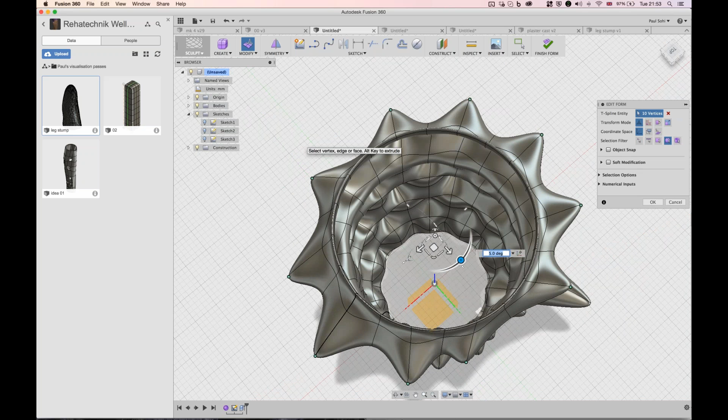I'm just going to undo a few things to get back to this when it was in its patch mode. Wait, what am I doing? I'm in the sculpt environment. Sorry, let me just - there we go. Undo that, and keep going until we're at patch. There we go, so we're at patch.

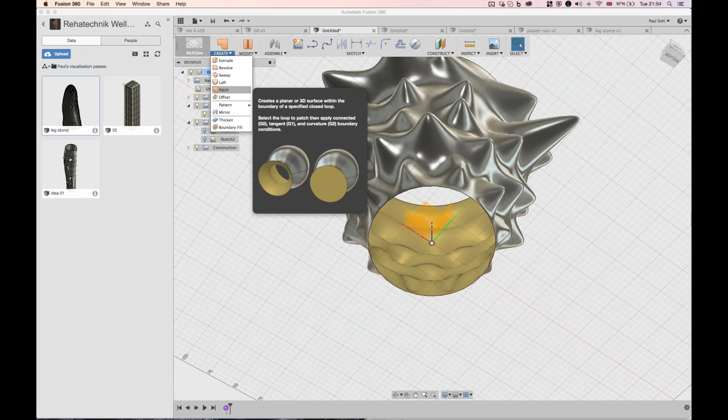Now I can go sculpt, patch, and on the bottom here, if I go to create and patch, I can pick that bottom edge and hit OK. Now that works, but again, it's still just a patch, so you still have to thicken this whole thing afterwards. But before you do that, you can see I've got two patches here, and the first tool on the modify menu is stitch, the icon right there. So I just want to stitch these things together. Okay, now why didn't that work?

There we go. All right, my mistake. So you can see when I stitched it there, I had a green edge. The green edge lets me know that when I hit OK, those are going to be turned into one thing. So that's one way of doing it.

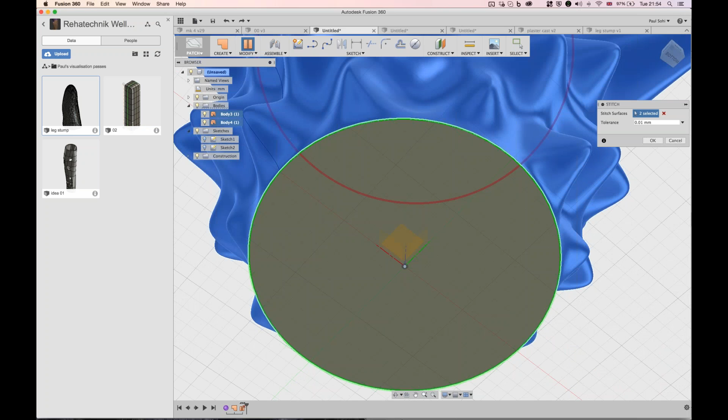Now that I've got that there, I can thicken this. How do I do that? I'm going to go back to my model environment. Thicken is... somewhere. Where is thicken gone? There it is, there's the guy. Grab him, and then I want to do that outwards, so let's just pull it that way.

This is a pretty complex geometry, so it's going to have a bit of a think on that one. While it's thinking... but that's sure, that's how you do that.

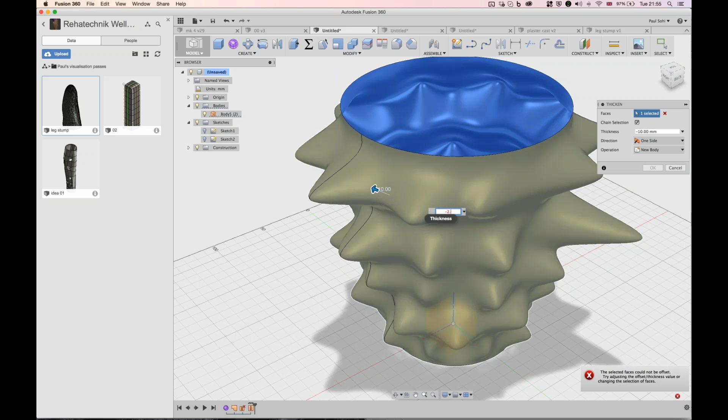While it's thinking, I have another one for you, and I'm interested in your answer. So it says, may I ask if Fusion is able to create assemblies of the same quality as Inventor? I'm not sure how to answer that question. That's like asking me, is Pablo Picasso better than Rembrandt? As far as the kind of stuff I've been building in Fusion, I haven't felt the need to use Inventor at all.

I'm currently, and as much as I would love to show it to you, I can't right now, but I'm currently designing a motorbike, and I'm doing that in Fusion. Obviously any kind of motor vehicle has got a huge number of parts, and I've not felt the need to go to Inventor. So you can do pretty complex assemblies in Fusion, but it's so contextual. I have no idea what you're making, but I'm going to just take the default assumption that yeah, it works.

I have one more here, and then we probably need to wrap it up. Two more, and then we need to wrap it up. One: can you create generative designs, or is that coming in the future? You can create generative designs. We have the API, and the API will take Python script, JavaScript, and C++. Mike Aubrey's done a pretty good video recently on how you can use that API to generate things, and he shows how you can do a Fibonacci spiral. You can see that on the YouTube channel.